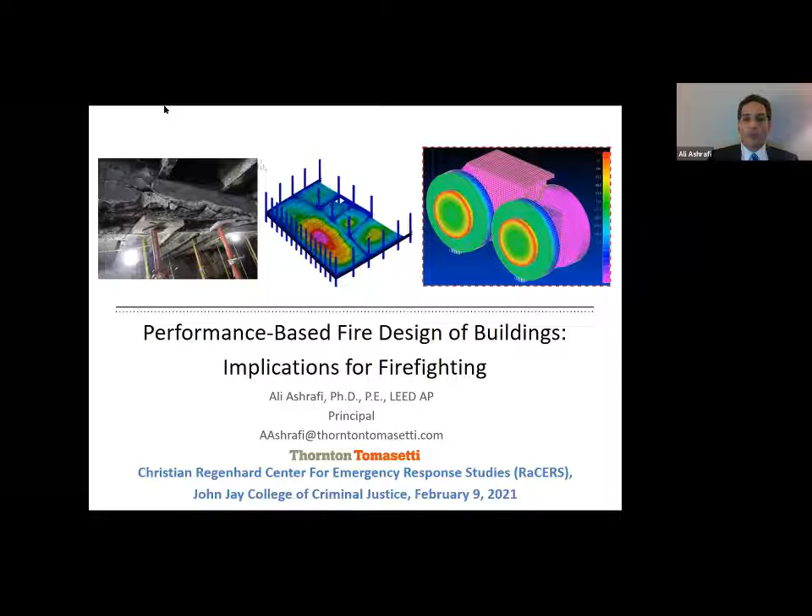So why are we having this conversation? The way we're designing buildings for fire safety determines what happens in the fire. They're not independent things. How we design determines what a firefighter will face in a fire. And the common practice in the design has substantial limitations when it comes to fire safety, and those have an impact on occupants and firefighters, especially when it comes to more high impact buildings.

And at the same time, we know that we can have designs that are safer, but those designs are not as common and they're not required by the code. They're permitted by the code, and even there, it's a long process. Now, I use the word design, but the discussion applies to both new design and existing buildings. And I will make separate points about what this means for new design and also what it means for firefighting in the context of existing buildings.

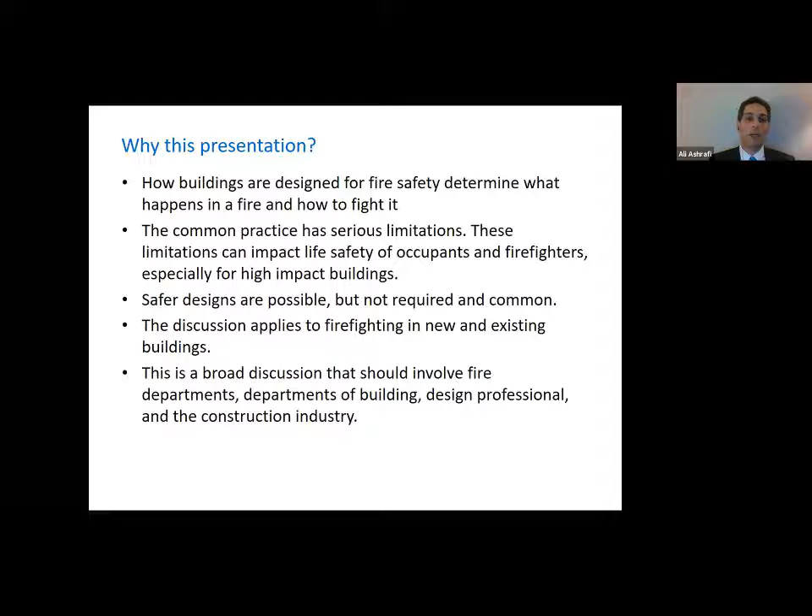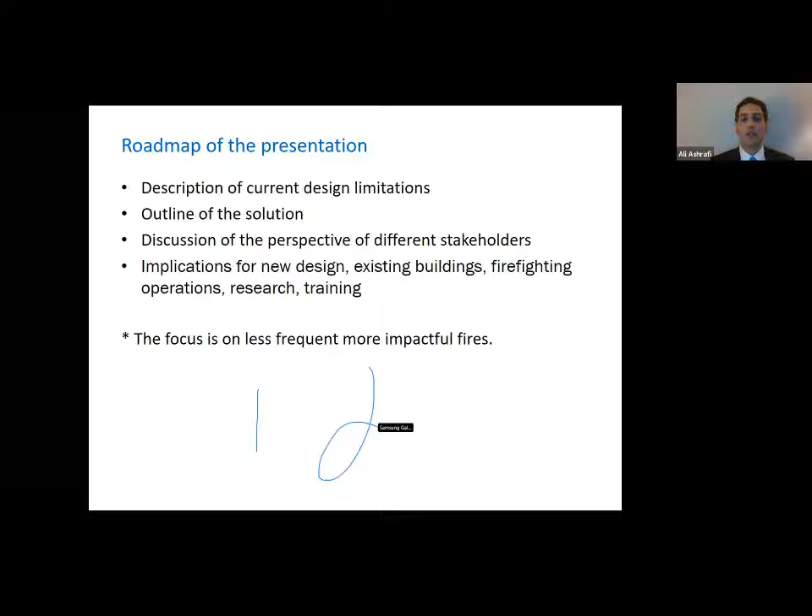And bottom line, to me this is a start of a conversation. We have a lot of people who are involved in fire safety. That includes fire departments, building departments, design professionals, the construction industry. So hopefully this is a conversation that leads to better and safer designs. For this presentation, I will provide a quick description of the current design limitations and then an outline of what the solution would look like.

And then we will have a discussion about the perspective of different stakeholders that are involved in this process, and also talk about the implications for new designs, for existing buildings, for firefighting in the sense of operations, research, or training. Although the discussion is broad, my focus will be on the less frequent but more impactful fires. On smaller, more frequent fires, I think we've learned a lot from experience, and we know a lot more about how to deal with them.

So what is the common practice? The common practice is prescriptive design. What that means is that the code tells you what materials to use and not to use, where to put it, and how to tie it together. So you are following the instructions of the code to result in a building. What it doesn't do is quantify what happens in a fire. You don't analyze what will happen, and you don't have any sense whether the consequences of a fire will be acceptable. It's presumed that once you follow those prescriptions, you'll get a safe building, but you don't actually design explicitly for that.

And when it comes to the question of stability of buildings in fire, that's a question that's not answered. That's a question that's not asked in the prescriptive design process. There's zero analysis involved in that.

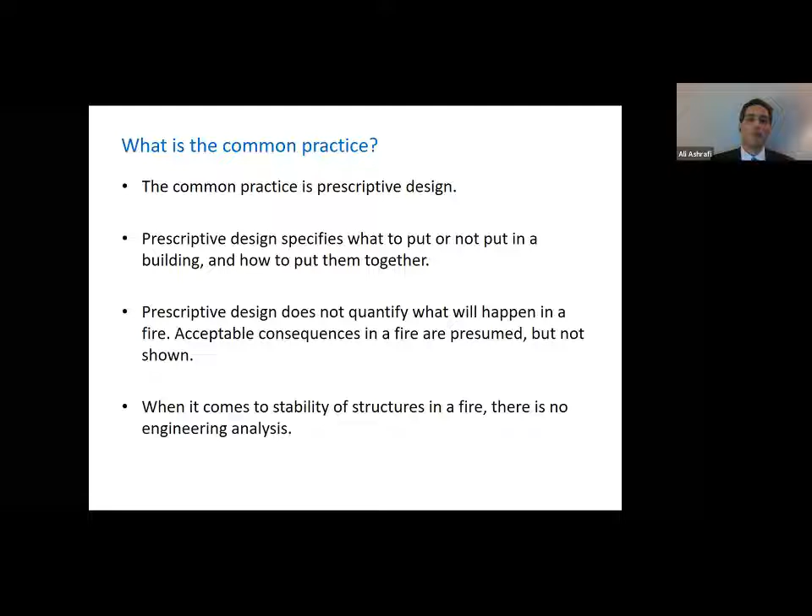Okay, so to put prescriptive design in context, this is what it would mean for us to design a shuttle using prescriptive design. It means that you would be using specifications and testing procedures from previous generations of shuttles, although now we're dealing with shuttles that have a different size, different materials, you're trying to get to a different location, you're using different fuels, but you're using that older set of instructions to come up with your design.

And we provide component specifications. For example, the specifications would tell you to have this tonnage of fuel within your shuttle, and the thickness of the exterior of the shuttle shall be this much. But you do not specify performance goals. You do not say, design such that the combustion gives you enough force so the shuttle can escape gravity. Design such that the heat of combustion and re-entry does not burn the shuttle. Those would be things that we actually care about.

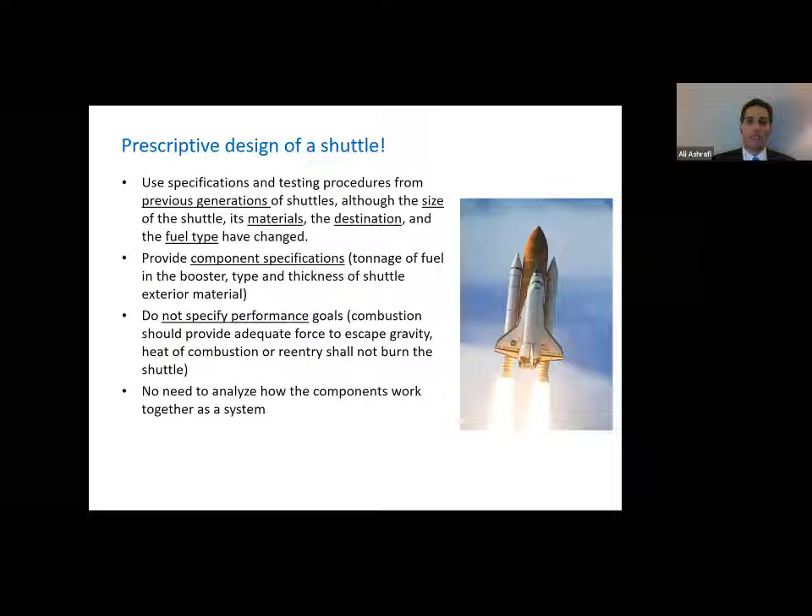They're performance goals. Those are not specified in a prescriptive design. And then once we've tested individual components, we don't do any analysis of how they work together as a system when you assemble them into a shuttle. That would be prescriptive design of a shuttle. I don't think that would be a good process. That's exactly how we're designing buildings for fire.

So we use testing and a design framework around the concept of fire resistance ratings, which was developed a little more than 100 years ago. And in that time frame, the size of the buildings has changed, the materials that we used, the construction techniques, how we design the buildings, what is the layout of your floors, what do you do inside the buildings, and what goes inside the building and forms the fuel. All of these things changed while our design process and the framework is basically the same.

And then within that process, we specify component specifications. For example, your individual elements, your beam or your column has to have this much fire resistance as defined in code. Your sprinkler has to have this much capacity. Your standpipe shall provide this much water access. Or your means of egress should be this wide. Those are all prescriptive. We tell how to build the building.

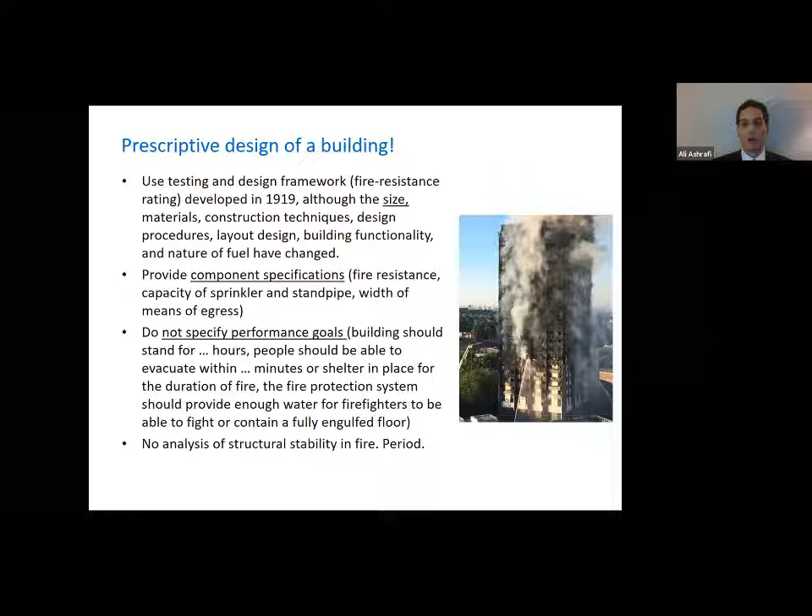But we do not specify performance goals, which would be telling, okay, your building should stand up for this duration, or people should be able to evacuate within these many minutes and either shelter in place or evacuate the building entirely. Or saying that the fire protection systems within the building should provide enough water so that you can fight a fire of such size. Those are performance goals that would be actually useful in terms of understanding what will happen. Those are not specified in the code. And when it comes to structural stability, there is zero requirement for analysis. That's the prescriptive design of buildings for fire.

And that's a process that I want to highlight, compared to not having that, has improved safety, right? Having fire resistance is good. Having standpipes that provide some water is good. Having some requirements on egress is good. And for buildings that are smaller and fires that are more frequent, we have enough experience to know where the gaps are. The question is when you are stepping beyond that range.

Now, when it comes to firefighting in buildings, it's really important to pay attention to the fact that the building is the battlefield. That's where you are doing your process. So whatever happens to the building has a real impact on firefighting, and that building has changed substantially over time. As a firefighter, the goal is foremost life safety, right? And that includes the occupants, it includes firefighters and the public. And then after that, you have the goal of minimizing damage to the building, to the contents, and to the community. And there is interaction between these. If there's damage to the building when people are inside of it, or that impacts the area, obviously that's also a life safety question.

Now, when there's a higher risk to the people inside the building, that means that the firefighters will also have to take higher personal risk to go and rescue people, right? So to the extent that the design increases the risk or reduces the risk to the life of people, that directly increases or reduces the risk to the life of firefighters who are trying to do that. So better design can simultaneously reduce the risk to life for firefighters and the people inside the building.

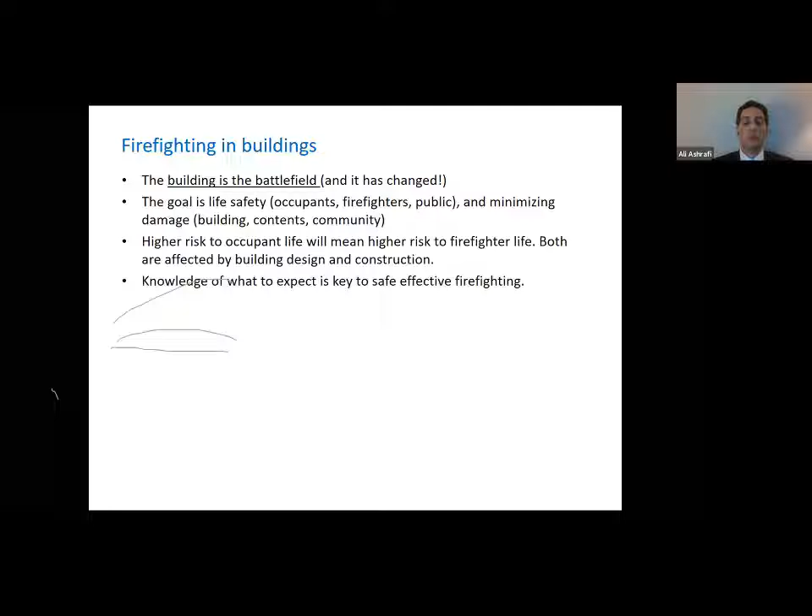That battlefield, the building, has changed substantially over time. We're building structures that are taller, larger, leaner. They have wider spans, and they have different construction techniques than we used decades ago. It's quite common to have open floor designs, which change the extent and spread of fire. The exterior walls of the building look very different from what we had a few decades ago. You have different air tightness.

Your windows typically have a lot more integrity. You might have some combustible materials within the construction of your exterior wall. And then the system is a lot more complex. That facade has to provide lighting, energy performance, fire safety, constructability, aesthetics, all of the above. And so there are competing demands on the exterior wall, which means we have much more complex systems to deal with compared to, again, 50 years ago.

We also have new building materials that are becoming more common, high performance concrete, heavy timber, etc., that are coming into the structures, but we don't really treat them separately to see what that means for the design. Looking at firefighting response, obviously, if you have a taller or larger structure, it takes longer and it's harder to have access for firefighting, right? That should have an impact on how we look at these designs.

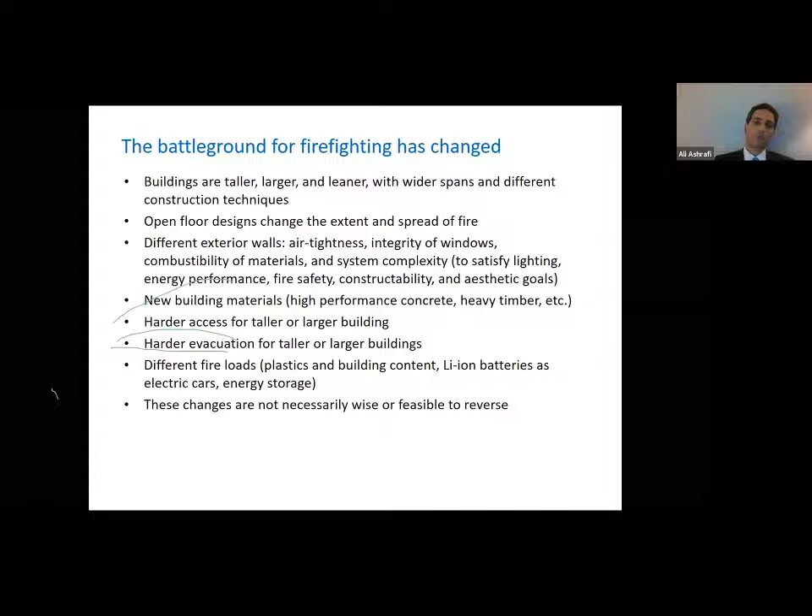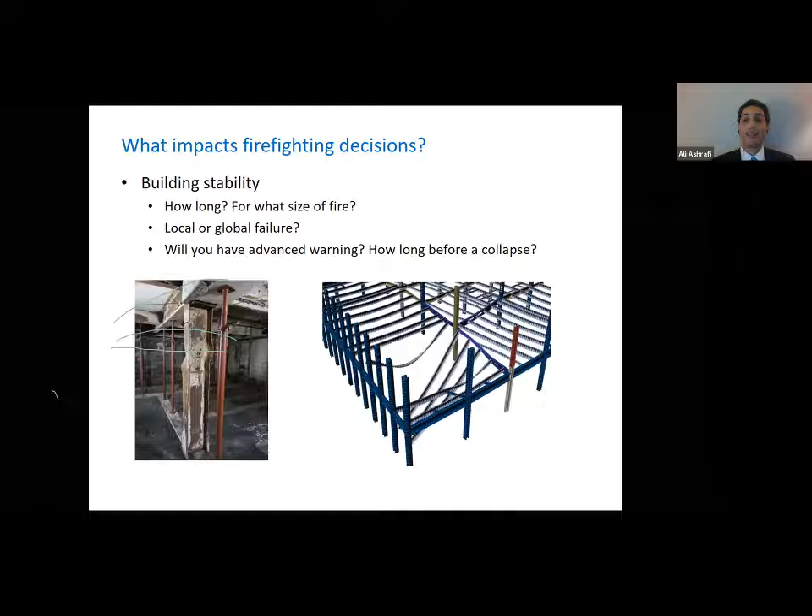So now, when you look at it from a firefighting perspective, there are a few things that will have an impact on your decisions. One of them is obviously building stability. So here the question is, how long will the building stand up, and for what size of a fire? If you have failures, will they be local and contained failures, or will they be global failures? Will you have advanced warning that something is going to give way? And how long will you have before that collapse? So these are questions that are very related to the design, right? But they really impact firefighting decisions.

And the nature of fire itself. Is the fire local, or does it involve the entire floor? What is the speed of that spread? Are there any additional specific hazards, such as hazardous materials or explosion risk associated with it? Has the fire spread to multiple floors? Is there fire on the exterior of the building? These are very impactful on how to fight the fire. They're all driven by design and construction of the building.

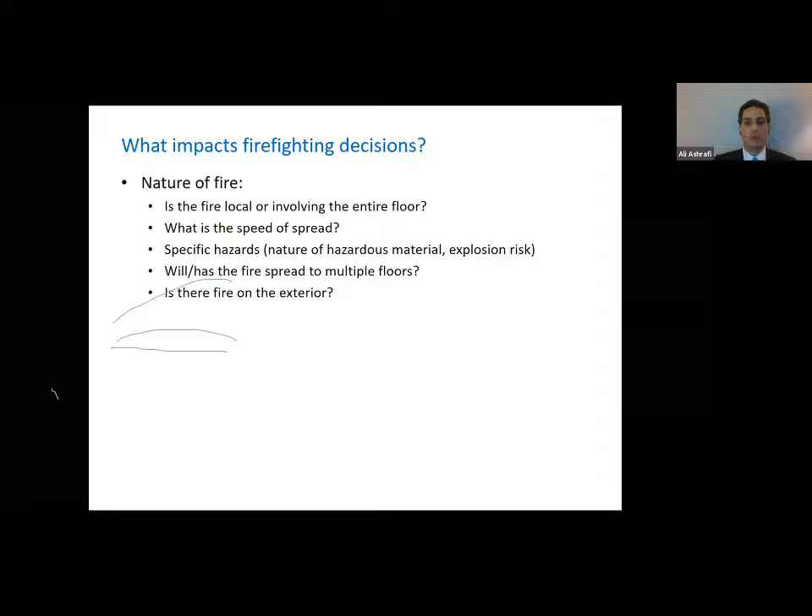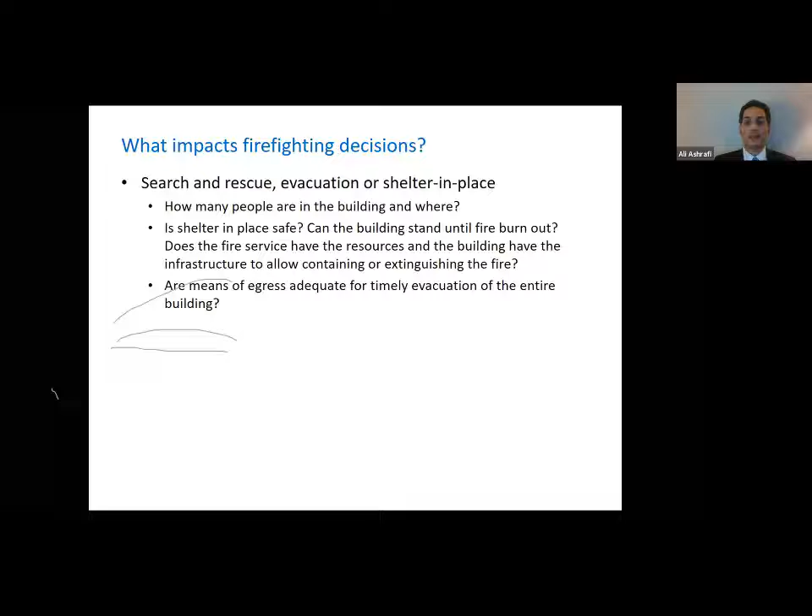There's also the question of search and rescue and whether you can evacuate or have to evacuate, or whether people can shelter in place safely. So obviously you need to know how many people are in the building and where, but then the question is, is sheltering in place safe? Can the building stand until the fire burns out? Does the fire service have the resources, and does the building provide the right infrastructure to allow for containing or extinguishing a large fire? And related to all that, are means of egress adequate for timely evacuation of the entire building? Or do you have to have shelter in place as part of the process? Again, these are questions that are impacted by design and construction of the building.

On the logistics of fighting a fire, how long does it take before you can start the effective firefighting? If you're fighting a fire on the 40th floor of a tall building, you can't just go in, right? And you don't have access from ground level to help you. How much does search and rescue interfere with the firefighting mission, right? Those are competing demands on the same people and on the same means of egress, for example. And are the building fire protection systems, such as the standpipes, the sprinklers, adequate for the type of fire that you will get in that building? Or are they helpful, but they're not enough?

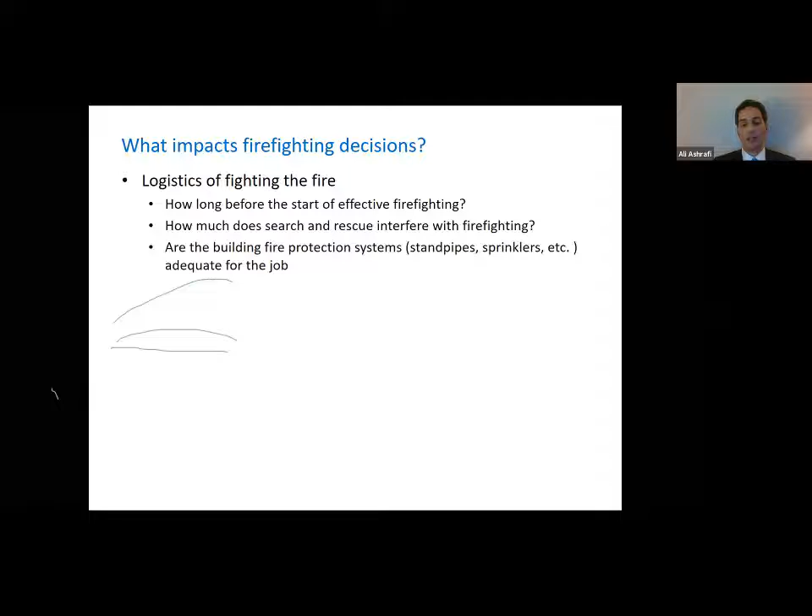And then how typical is the fire? So if you're dealing with a fire that happens frequently, you've had experience with this, your colleagues have had experience, that's useful, right? We know how to fight them, they're known. So that's good to know. But if you have a large fire in a complex and unique building, such as a high-rise or a complex space, we probably haven't experienced many such fires, right? And so each of those will be a unique experience, and so that bears on the decision-making by firefighters.

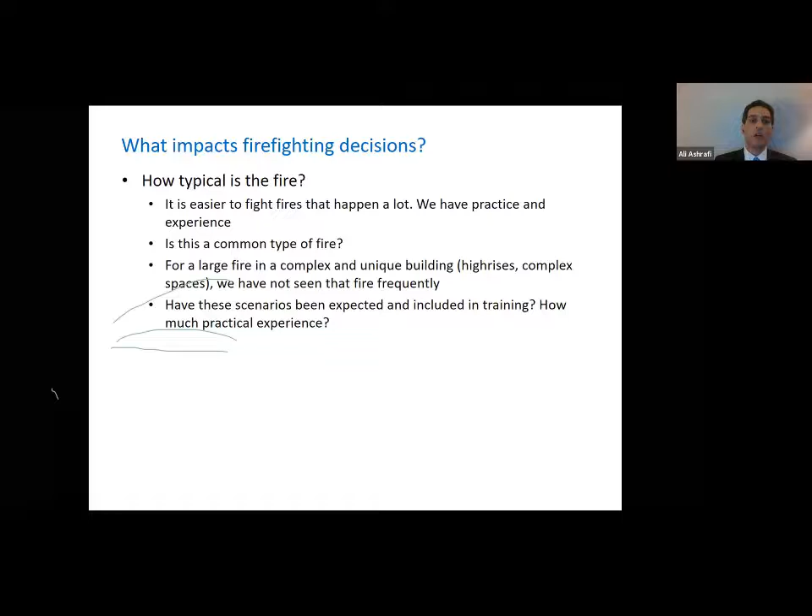And to the extent that we've thought about this or we haven't, are those things that have been or can be captured as part of the training, so that even though you don't face that fire every day, when you go there, you've gone through the exercises multiple times, understanding what will happen in the building. So these are all very relevant questions to firefighting: building stability, the nature of the fire, search and rescue, logistics, and the nature of the fire, how typical is that? Most of these are impacted by how we design the building. And so that relationship is very important.

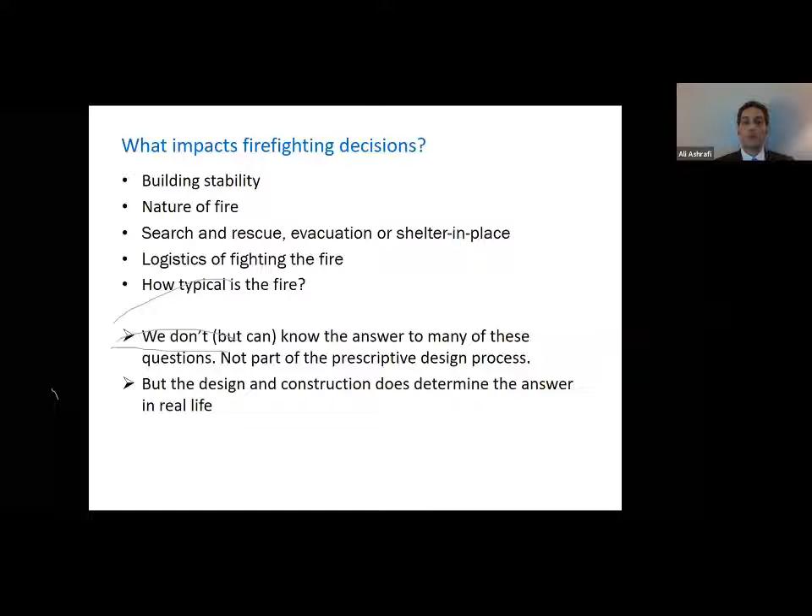For most of the buildings, if you ask these questions, we don't know the answer. Not that we can't know the answer, but we don't know the answer because we haven't analyzed the building; the design process does not require such analysis. And so that is a limitation, right? You don't have the answer to the relevant questions to make the right decisions for your safety and the safety of the people. So although the design doesn't answer these questions, the design and construction determine the answer to these questions. We just don't know them because we haven't asked the question. So to me, that is a real problem, right? That does pose real risk to firefighters and the public.

And the solution, the key to the solution is knowledge. We need to know what we have. For a specific building, what are the risks involved in the fire, the building stability, the egress and evacuation, and how do those things interact with each other? What are the consequences of your fire, right? And what are those interactions? We also have to realize that for these more complex buildings, each of them is a custom design. Each of them will have a somewhat different behavior. Going back to my previous analogy, each building would be a different shuttle. You can't just copy paste and assume that it's safe. You really have to look at the specifics of your building.

And so the solution to that is performance-based design. That's a term that you might or might not have heard, but what it really means is you're looking at individualized design for acceptable consequences. So you're looking at your building, the one building, as opposed to a typical building, whatever is specific to that building. And you're looking at the consequence of the hazard, right? In this case, for a fire, what will happen after the fire? And what you're trying to get through your design is to make sure that those consequences are acceptable. Those are consequences that in this context you can literally live with, right? That's performance-based design. And that is a rational design process. So you have very specific safety goals, and everything that you do is because it's providing some additional benefit in terms of getting to that goal.

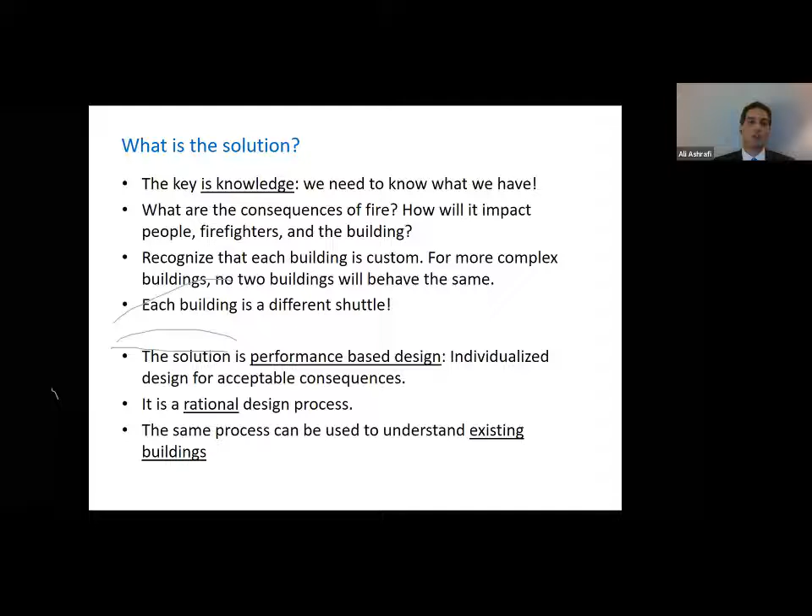Now, I mentioned this as a problem. I think I gave you why this is a problem, but this is also not just a theoretical, abstract problem. This is a recognized problem. I'll give you a couple of examples. Here are a few examples from full-scale tests that were done by NIST very recently. So they did a couple of tests on steel beams, long-span steel beams with concrete on metal deck. So very robust construction, fireproofed fully, and they subjected them to realistic compartment fires, which are typically less intense than the furnace test we use for fire resistance testing, right? So the fire was realistic and less demanding than the testing.

In their testing, they had several cases where the beam failed. So you would have a collapse of the beam that's fireproofed, and the failures happened in the range of an hour, plus or minus, in some cases. Some of the failures happened during the heating, some during the cooling phase. So they had cases where they turned off the furnace, they're going home, and the next morning when they come in, the beam has collapsed, right? And you can see the behavior of, again, these are code compliant, perfect construction.

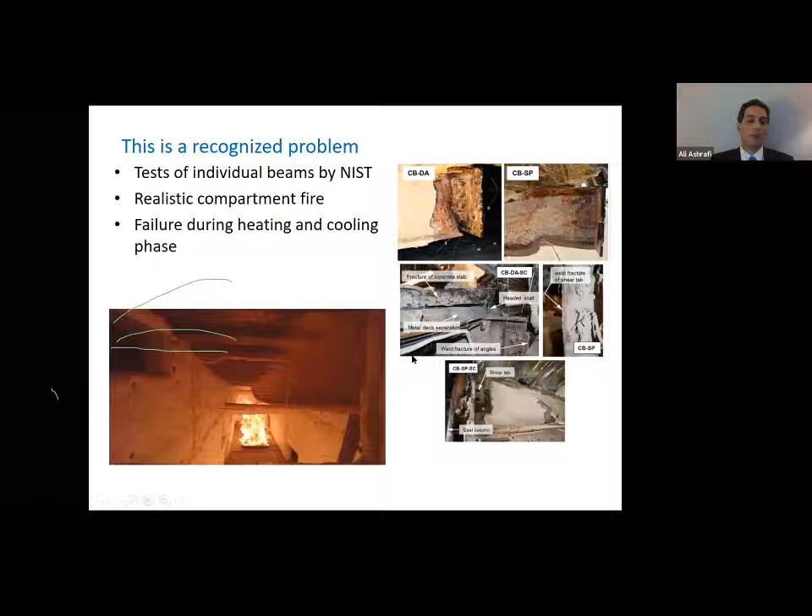This is how the beam looks like. Obviously, they've removed the fireproofing so you could see what it looks like. You have failure of the connections. You have separation of the concrete from the metal deck. The bolts have sheared off, major failures in designs that are realistic.

This is another test where they did a full bay, two-story full bay, actually 2 bays of a building, same type of construction, and the testing was finished a few months ago. So for this one now, they're using the standard fire curve. So this is what you would use for getting your fire resistance rating. And this is constructed according to a 2-hour rated construction.

And after 70 minutes, you have major breach into the slab. So you're having flames showing up at the next level, which means now you have a fire that has engulfed 2 floors. Entirely changes everything about assumptions of stability, evacuations, and how you fight the fire, right? And that happened in 70 minutes for a structure that is fireproofed for 2-hour fire rating.

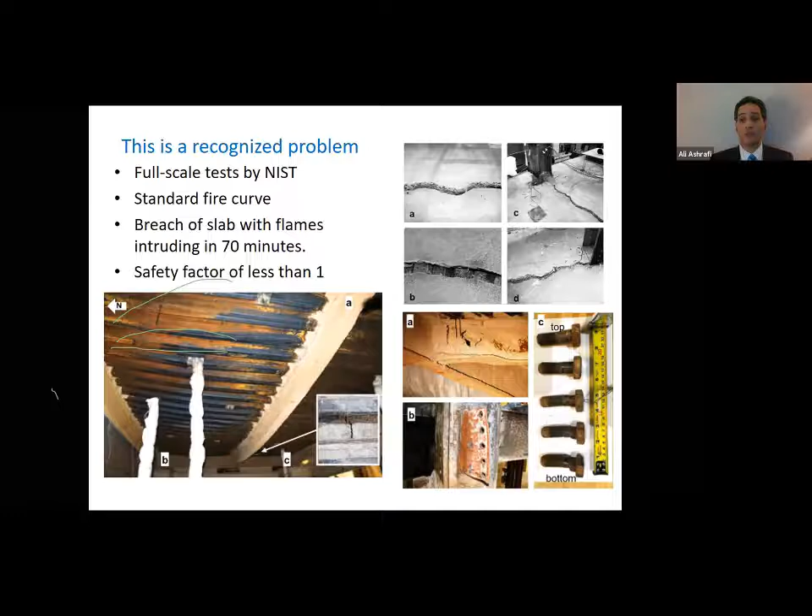At 70 minutes, they stopped the testing, so they did not continue, and there was no collapse because of that yet, but there was major damage, including rupture of some of the bolts at that point. So this is not a theoretical conversation. These vulnerabilities are real. And these are very substantial structures, right? These are robust buildings. A lot of the buildings are not as robust as that.

Similarly, there was a study that was sponsored by ASCE, which is the American Society of Civil Engineers. We were part of that discussion, and we looked at 4 different buildings and how a prescriptive design would behave in fire versus how a performance-based design would behave in fire. And for example, we looked at a typical high-rise and a comparison. And in the case that we studied, because you could not evacuate that building quickly, the goal was getting resistance for full burnout.

And there was no amount of fireproofing that we could put for that specific design that would get you to that performance. A safe design did require adjustments to the structure, most notably to the connections, and also some redistribution of the fireproofing. And actually, we put more fireproofing on the connections, we put less fireproofing on the beams. All in all, there was less fireproofing within the structure, but it was distributed such that it's where it's providing the most benefits, and the structural connections were also adjusted to provide that performance.

So we managed to show that the prescriptive design is limited, but B, you could actually provide a safe design, and that safe design is not necessarily more costly. It's just you've gone through the process.

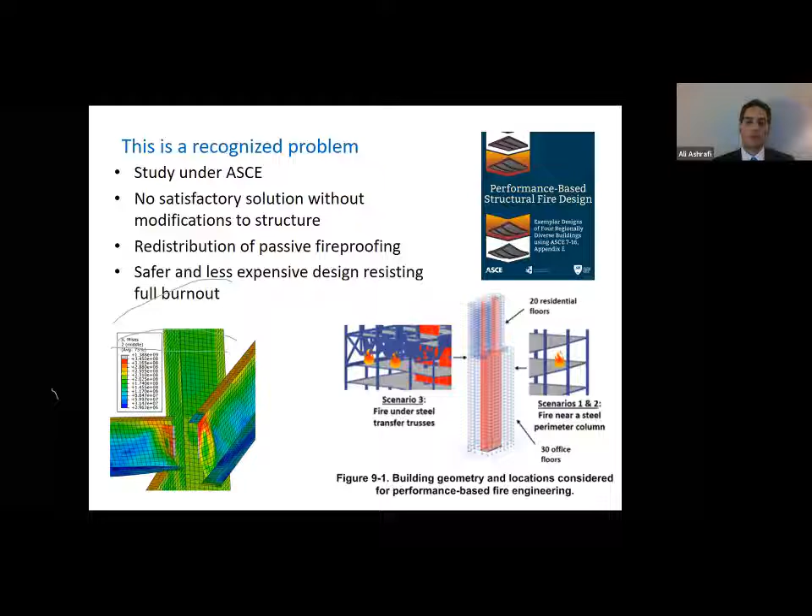I also want to bring a quote to say this is also not just structural engineers talking about this. So this is a quote from Bobby Halton, which I'm sure Glenn knows him very well. He's the editor-in-chief of Fire Engineering, and he's the education director of Fire Department Instructors Conference. And he was chief of training and operations at different times at Albuquerque. This is from a paper that was published probably less than a month ago. I'm just going to read the quote.

While the fire service is thoroughly engaged in evaluating our tactical and procedural approach to structural firefighting, the very battlefield where we conduct those firefights is not undergoing the same rigorous evaluation and study. American firefighters want buildings and their structural systems to be studied under modern fuel loads. We want these structural systems tested as a complete building, not individual pieces. We want that research communicated to us so that we can better evaluate areas of refuge and evacuation routes and have a greater sense of understanding regarding collapse and failure.

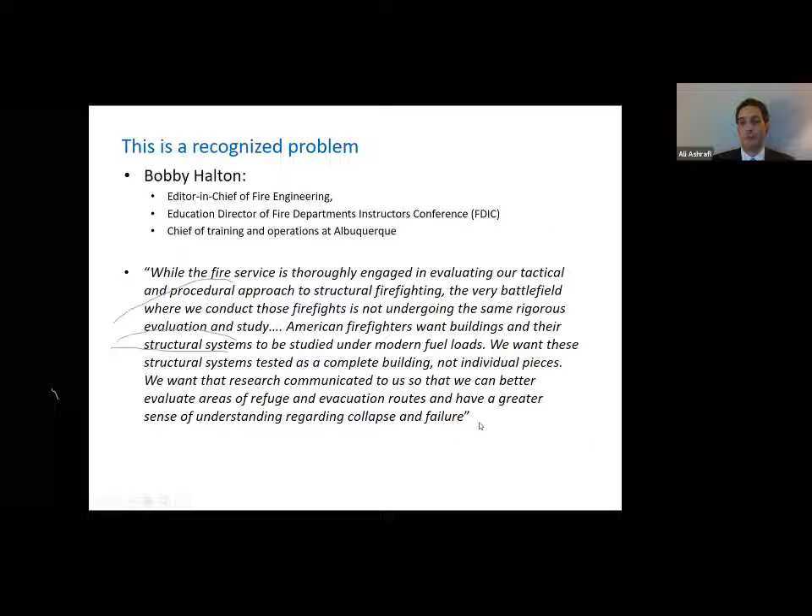So this is a real problem. We have real solutions to that. And so we want to see what the implications are. I'm bringing another quote also from Dr. James Quintiere. For anyone who might not know him, he was the chief of fire science and engineering at NIST, and then he went to University of Maryland and was a chaired professor at the Department of Fire Protection Engineering there. They asked him about one area where you would want to do really more studies.

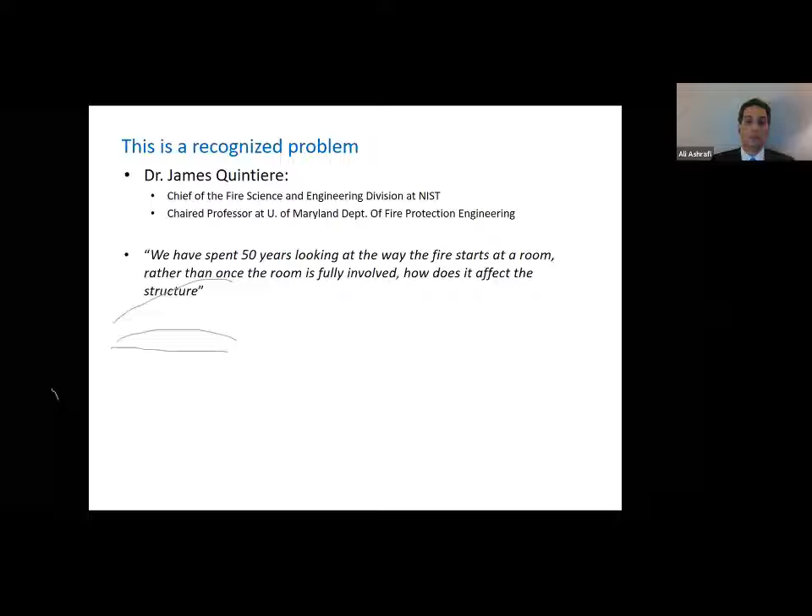And he said, we have spent 50 years looking at the way the fire starts in a room, rather than once the room is fully involved, how does it affect the structure? So this is a very relevant question for us. Now, my background is structural engineering. So my focus has been more on building stability as opposed to, for example, the standpipe capacity.

But I do want to mention that the other elements of fire safety, meaning means of egress, and also the design of sprinklers and standpipes and smoke control, those are also prescriptive, right? So the design doesn't say, okay, you have a large floor, it's an open floor, you're very likely to get a fire that involves the entire floor. What is the water that you need to fight that fire successfully? That would be a performance-based design, but the design doesn't do that, at least at this point.

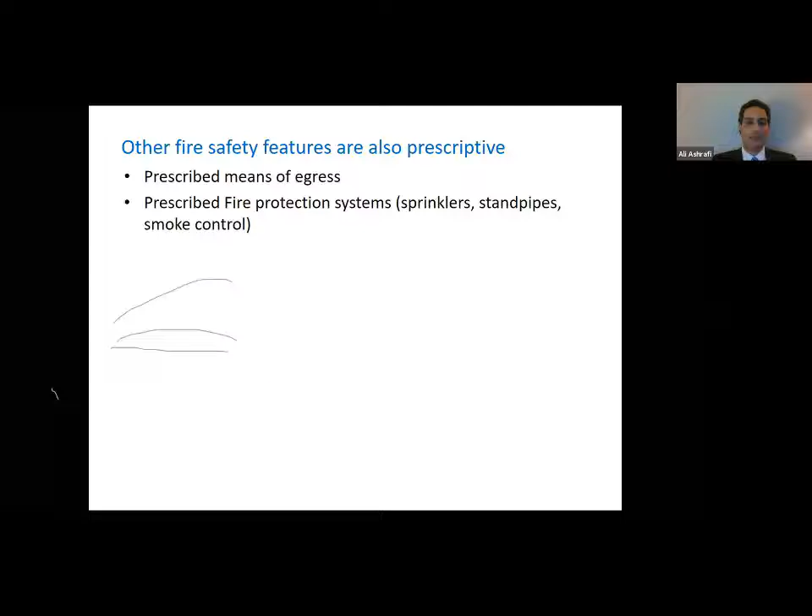And so I've talked about limitations of prescriptive design, but very broadly speaking, the main limitation is that you have unknown and in many cases unacceptable fire consequences. But the fact is it's unknown, so you can't plan accordingly to know how to provide safety. It's also not the most effective use of fire safety measures in a building. It's not a rational design. You're not doing things because they provide a benefit. You're doing things because you are checking the box in the code.

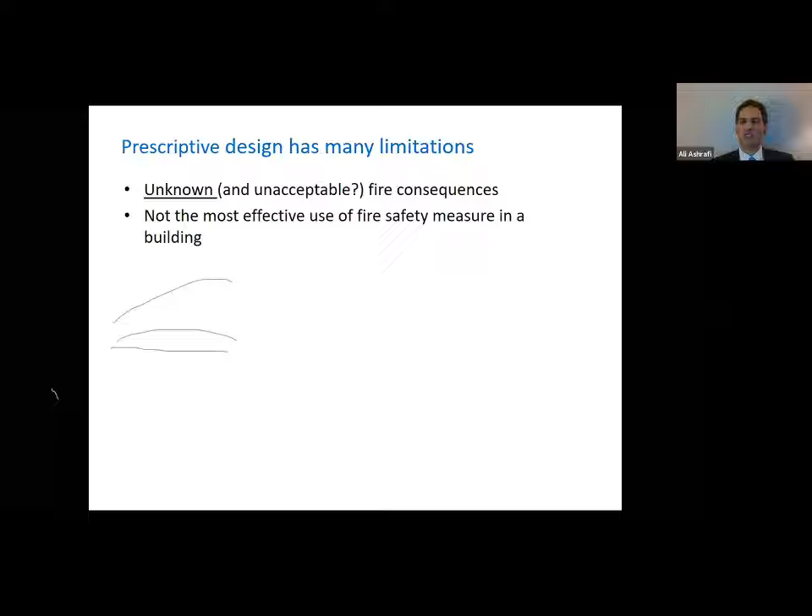All in all, the combination provides some benefits, but it's not the most optimal, the most rational design. And so that actually could mean that you have a more expensive design. It's not providing as much safety at the same time. Now, let me spend a few more minutes talking about why we get all these limitations from prescriptive design, and then I will jump into the discussion of implications.

Really, one of the main problems is that prescriptive design is based on component tests, not system tests. So we test an individual beam or an individual column. We don't test them together, and then we don't analyze them together. To bring the point home, we don't even test connections. The whole process does not have a protocol on how to test a connection. And I've mentioned connections are one of the most critical elements of building stability in a fire. So that's just not part of the process.

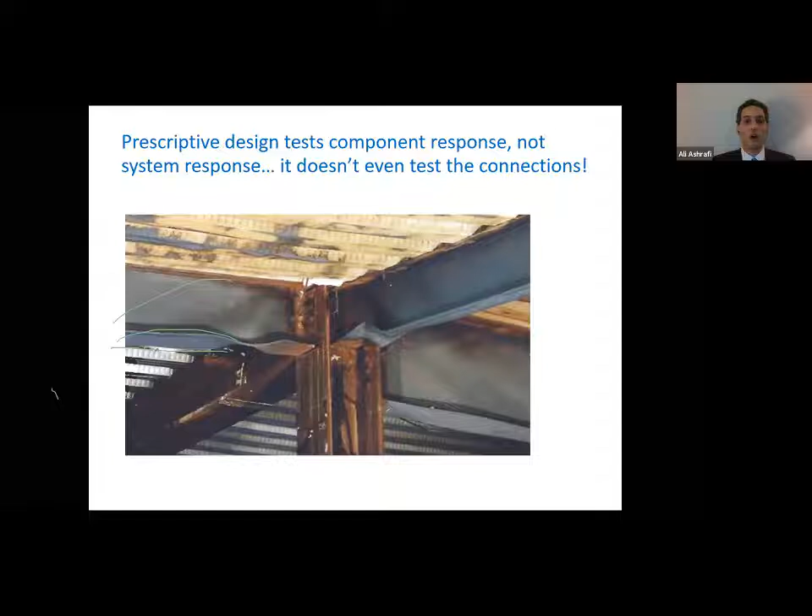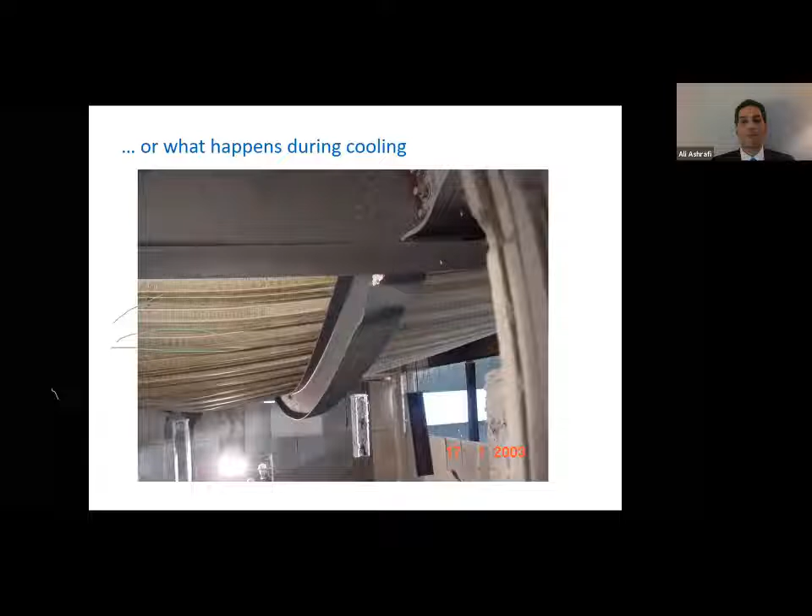The process does not look at the effect of thermal stresses properly. It doesn't look at what happens during cooling, which is where you might get failure. And again, cooling is relevant to firefighting. If you're fighting a long fire, you will be there for some duration after, or you might be in some part of the building, and in another part of the building, you are going into that cooling phase, right? This is a very relevant question to life safety.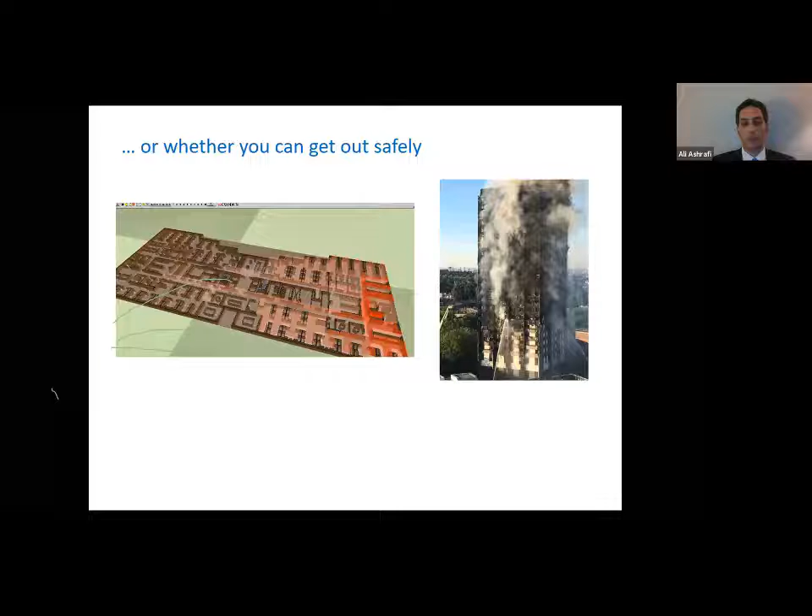Even going to the question of whether you can evacuate safely, that's a question that's not asked in the code. The code gives you prescribed means of egress, but very simple analysis can show that in many typical layouts, you could actually lose people, a significant number of people, in a building that is code compliant, because we don't ask the question. Once they check the boxes, the design is considered acceptable.

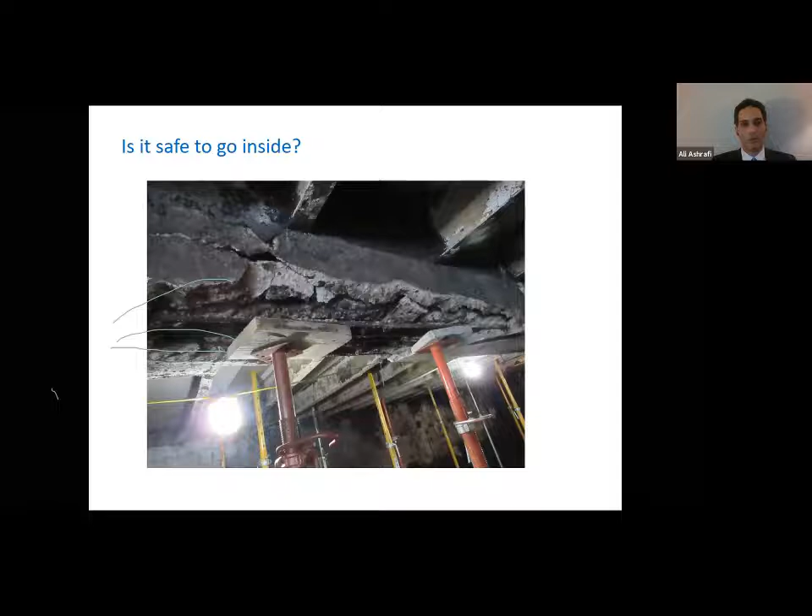The fire could be hotter or colder. It could be shorter or longer. The design process doesn't care. It's always that black line. In a lot of buildings, the actual fire demand on structures could be a lot less. We don't look at that. In some buildings, the demand might be more or different. Just to bring an example, I mentioned lithium-ion batteries.

If you have lithium-ion batteries having thermal runaway and starting to catch fire, what they produce is a much hotter fire. The temperature of the fire is more than the melting temperature of steel. So that's different from what we're testing for. It's also initially a much more intense fire, and it produces its own oxygen. It's much harder to fight. And the gases that it's producing are also potentially explosive.

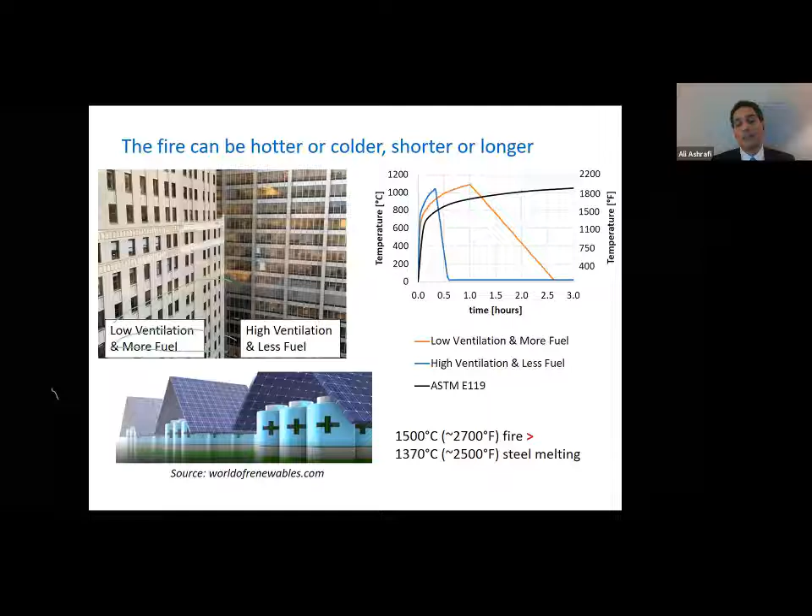So it's harder to get close and deal with that. All of this means that it's a different fire risk. It doesn't mean that you can't deal with this, but it means that you have to deal with it, right? If your process hasn't looked at that, then you have an unknown risk to everyone.

And an important question is, if something fails per design, because the design is not always trying to prevent failure, right? Even the code gives you specific durations of rating. The presumption is, if you have a 2-hour rating, I think everyone assumes that means you have 2 hours of stability. That doesn't really mean that, but it could be for a limited time.

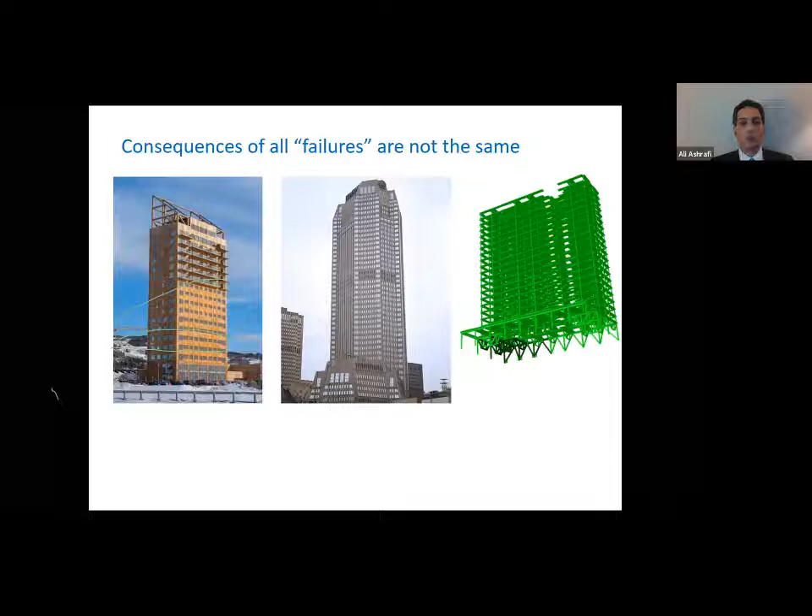But what is the consequence of a failure? A failure of a building that's smaller, where people have gotten out, where the failure is contained, is very different from a failure of a larger building where people will be inside and you could also have an impact on the entire neighborhood, right? We could presumably deal with those designs in a different manner. And the bottom line is, in the standard design process, we don't design explicitly for safety. We presume safety.

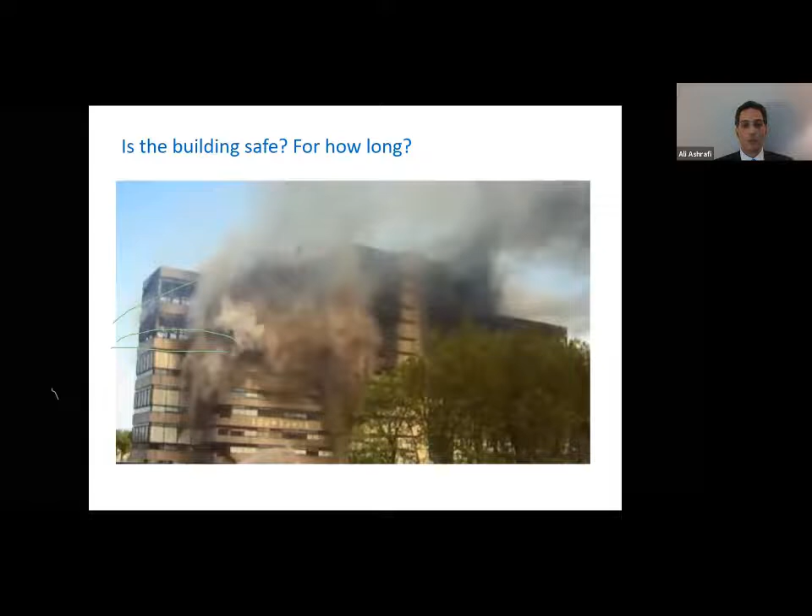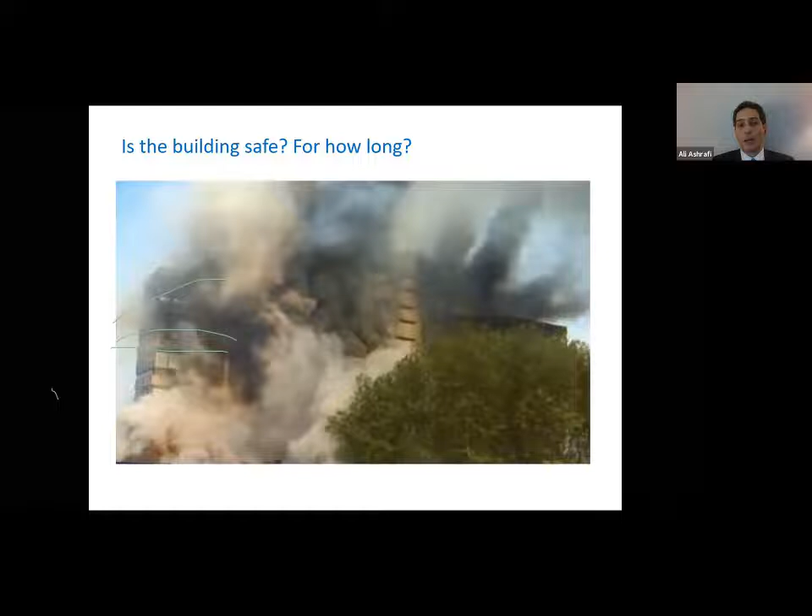This is an interesting video. This is a building in the Netherlands. It's a concrete building, which you would think of as somewhat more robust. And they had a small fire starting from a coffee vending machine. And you give it enough time, and it brought down a significant portion of this concrete building, right? That could happen because, again, we don't design for safety in fire in that sense. We don't explicitly design for building stability.

So I think we do need to move toward performance-based design to have a right solution for that kind of a building. And what that means is individualized design. You look at that specific building and you are explicitly designing for acceptable consequences. That's the only way to verify safety and plan accordingly. Otherwise, code does provide measures that mitigate risk. You know you have some risk mitigation because of all the things that go in, but you don't know how much mitigation and what is the risk that you are dealing with.

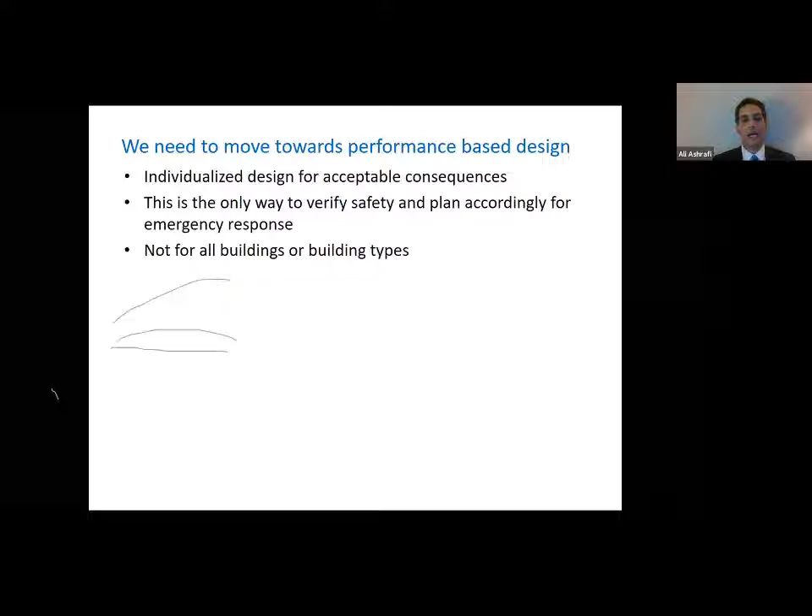I also want to highlight again, I'm not saying that this is the answer for all the buildings. A lot of the buildings are common enough within the range of where we've seen many, many fires and we know what to expect. This is really for designs that are outside that range and have high consequences. So we want to define performance goals and have them drive the design.

So some of the relevant questions here are, what are the access, protection, and time requirements to evacuate or shelter in place safely? This is for the people inside. And to fight the fire safely and effectively, right? Those are relevant questions. Those things should drive the design on access, protection, and the time that the structure gives you to do those things. Fire protection measures and systems, means of egress, all of them should reflect that. The structural design should also reflect that and provide adequate stability for that duration.

Or in principle, you could design high impact buildings for full burnout, where within each area, the fire has burned out and the structure can stand up. If you have a bad case and the fire is traveling, you might have a fire that extends for a long duration, but within each limited area, the fire burns for a limited duration before it dies out, and you can design the structure to be stable for that duration. The bottom line is firefighting strategy and design should be consistent. They do relate to each other. They have to also talk to each other.

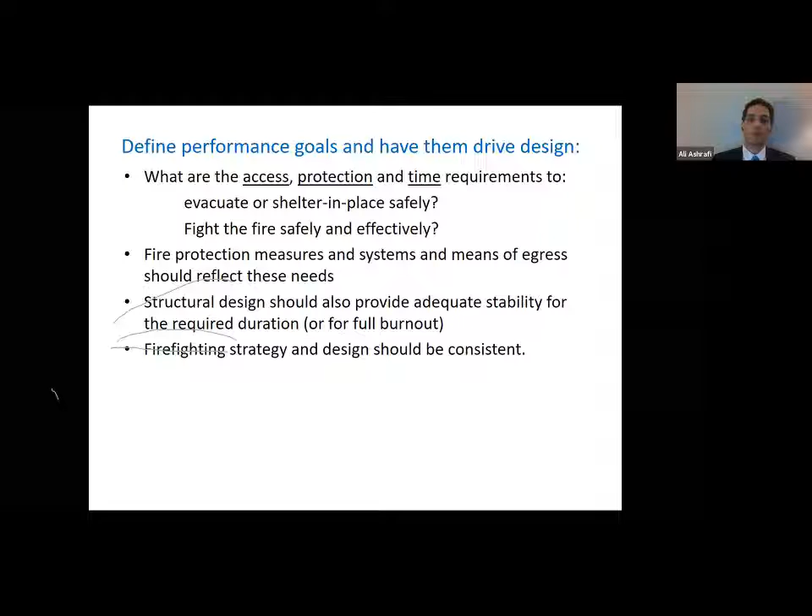Now, I've talked about performance-based design. It's important to note that codes do permit performance-based design. This sentence is the first sentence in the introduction to IBC. It establishes minimum requirements for buildings using prescriptive and performance-related provisions. So the process is permitted. Providing life safety for firefighters is also an explicit intent of IBC. And I mentioned IBC here as the mother code, where almost all the other codes are directly or indirectly taking provisions from IBC. So just for the sake of discussion, most codes would have the same types of provisions.

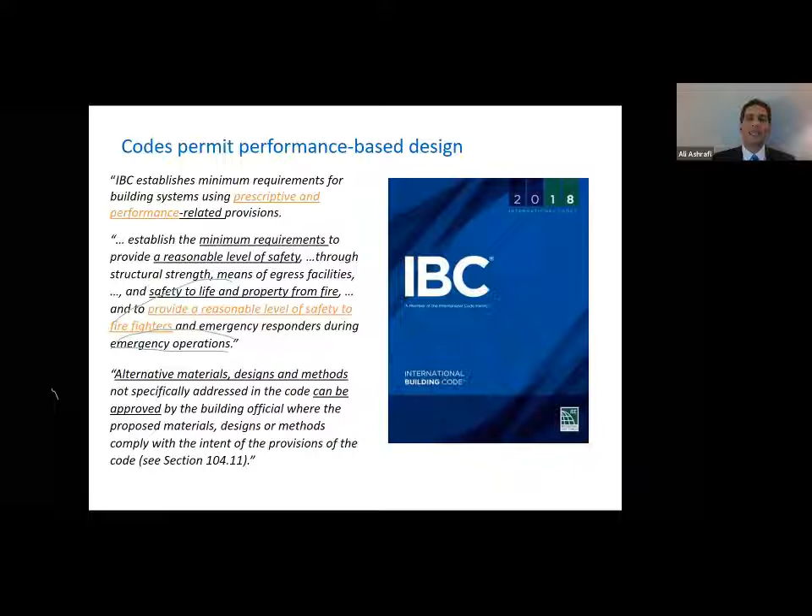And the code also allows for alternative materials, designs, and methods, but they just have to be approved by the building official or the authority having jurisdiction. So this is a process that's in principle permitted, but it does need specific approval from the authority having jurisdiction, or the AHJ. We also have standards for performance-based design.

We have standards within the steel manual, within concrete documents, within heavy timber documents, and there are codes on how to do that. So ASCE 7, which is the document that tells us how to design buildings, in ASCE 7-16, Appendix E explicitly discusses structural fire engineering. ASCE followed that with a manual of practice and then a practical guide for engineers on how to do that. And we helped author this last document. So it's there, it's permitted by the code. It's also safe and has precedent.

And it's good to look at it more broadly. We're talking about fire here, but obviously we design buildings for other hazards that could also be significant. For example, earthquake risk is a major driver in a lot of areas. We've been using seismic performance-based design for at least 40 years now. We're doing it widespread. If a building is important right now, most of those buildings do go through a performance-based design process as opposed to a prescriptive process.

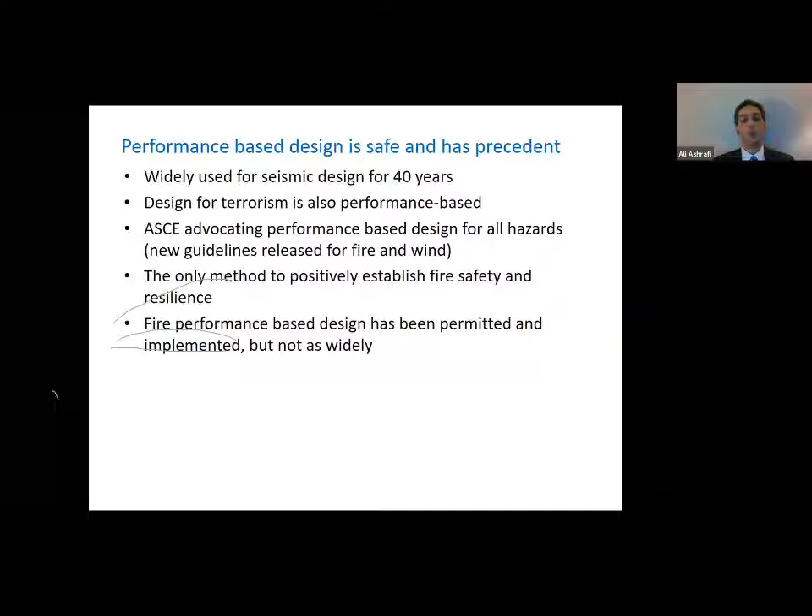And I also just want to mention, we don't have time to go through a lot of examples, but fire performance-based design has also been implemented within the US and globally. So it's something that we know how to do. It's just a harder process to get through, and not everyone has been doing that.

Now let's look at some of the implications. So one of the questions is, why would a public or private owner want to do fire performance-based design on their project, or decide not to do that? So let's look at it from that perspective, because we need to understand the construction industry as a whole if we want to have more performance-based design.

So the important points here are, one is performance-based design is optional. It's not mandated by the code. And also not all projects need it. A lot of projects don't need to go there, right? Performance-based design is also an intelligent design. It's a rational design. So typically what that means is that for the same level of performance, for the same safety, you actually get a more optimal design.

And so in a lot of cases, you can manage to improve safety, reliability of the building, and at the same time improve your design flexibility and economy. So in that sense, it would be an attractive option for an owner. Some owners might care about all of the above. Some owners might care more about the design flexibility and economy aspect of it, right? But that package does have the improved safety and reliability. You can't get the financial benefits, if there are some, without getting the safety benefits. And so that's important to note here.

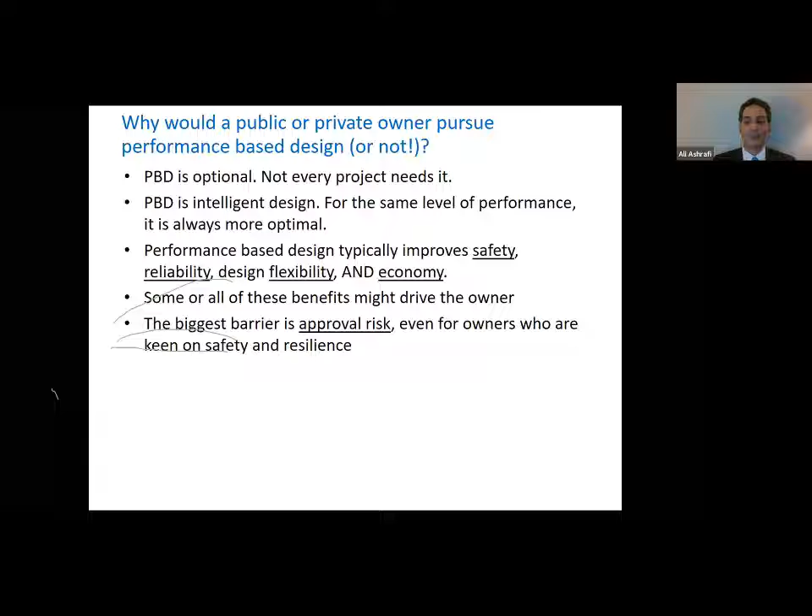But even for clients that care, I think the biggest question mark for owners when they want to decide whether to pursue performance-based design or not is the approval risk. If they think that that process is going to just sidetrack the entire design, they might decide not to pursue that, even if it has the safety, financial, design flexibility and reliability benefits. So that's really the biggest deterrent on the developer and owner side.

I think it's also really important to look at this question from an AHJ perspective. I'm not an AHJ, but I can say this. If I were, these are the questions that I would be looking at. It's really important to emphasize that the burden of proof should be on the design team, and it is on the design team. So the design team is coming and asking to do something different. The AHJ has to be very probing and make sure to put them to the fire and make sure that they actually provide a design that does provide all of that.

When it comes to the context of fire, it's important to note here that structural analysis should be part of that process. If there's a performance-based design and it doesn't look at how the building behaves in a fire through an actual structural analysis, that performance-based design is incomplete.

I think third-party peer reviews are also an important part of this process. They're important because they allow you to ensure the quality of the process, to make sure that when there's a design that's more complex, more advanced, you have a second person, a third person that has no incentive in the project, has the right qualifications, and have them vet the process too, so that there's more confidence and assurance to the AHJ. So I think those 3 steps are really important to ensure that performance-based design is done in a manner that provides the promise, provides safety for the building.

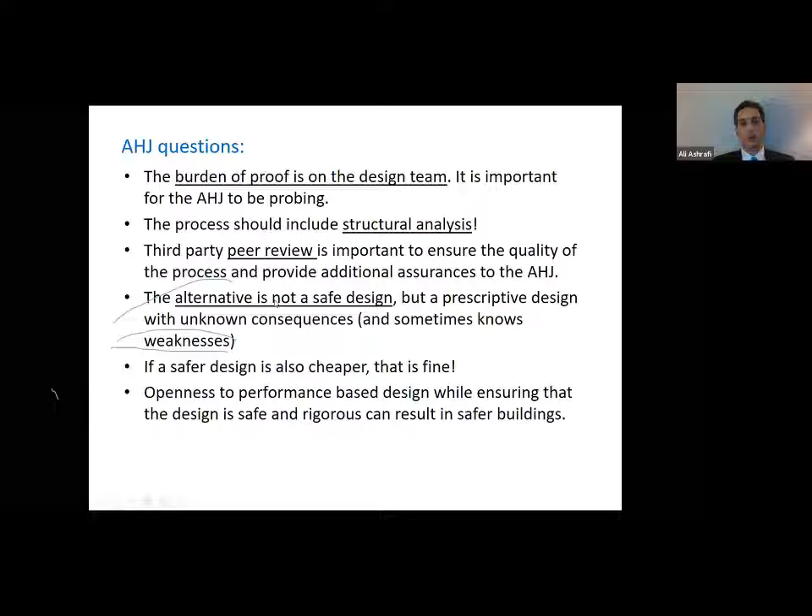And if a design really does produce a safer design, but it ends up being less costly, that is fine. That's a good thing, right? That actually makes sure that the incentives are there. The final result is we will have more buildings that are designed using this process. So we will have more buildings that are safe for the people inside of them and for the firefighters. So I think both sides of that are important to have in mind. It's really important to do the first 3 things to make sure that the quality is there. It's also good to remember that the alternative is not necessarily safer.

I think a question that is relevant, I'm not sure if anyone is asking the question, but should performance-based design be mandated for any structure? To me, the answer is maybe. It does involve more things. It does really depend on the context. So the real question is, what are the consequences of a failure? If you have high impact buildings, especially in dense urban areas where a failure could have very catastrophic and large scale unpredictable consequences, looking at resilient designs as a whole is a good idea.

This would be a change, right? And I'm not just talking about fire in this context. If you're putting a very substantial building in the middle of a very dense urban area, you want to make sure that that design is resilient for seismic forces, for fire forces, if it's relevant for terrorism, if it's relevant for flood, right? Having a process to look at resiliency more explicitly and then decide whether there is something more that has to be done for a specific building is, I think, a good idea that each local jurisdiction should look at and decide whether that's relevant to them.

I do want to mention one point here, though. Obviously, any time that you do something that increases the cost, there will be pushback to see if it's justified. I want to highlight the point that performance-based design is a rational design. For the same level of safety, you get lower costs. So putting it in a different way, if you're spending the same amount of money, you can always improve safety, right? So if done right, in most contexts, performance-based design is not a more expensive design. It's just a more rigorous design. And that's something good to have in mind. Resilience doesn't mean more expensive. It just means better.

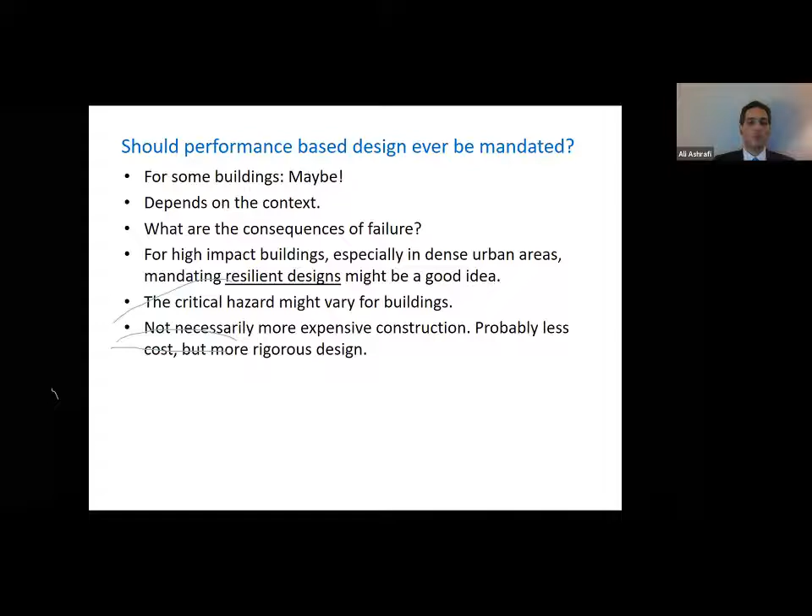Now, design can definitely make firefighting safer and more effective. I want to go through just an example, very high level. Let's say you're looking at a high-rise. Depending on what you have, timely evacuation of all the occupants might not be viable. And it's a high-rise, so it takes more time to start your effective firefighting. And just for clarifying here, for high-rise, I don't mean more than 75 feet. I mean tens of stories in this context.

In these buildings, it's also very common to have open floor designs, and that allows for faster spread of the fire to the entire floor, right? So it might be very possible, if you're responding to a fire in a building like that which was not initially contained by the sprinklers, that you will have a fire that's engulfing an entire floor. And so the design of sprinklers or the design of standpipes does not necessarily incorporate that.

They're not necessarily designed to fight a fire that's involving the entire floor roughly at the same time. That's something that in the context of fire protection engineering can be looked at, right? That's an element of design.

On the structural side, design for fire burnouts would certainly be more resilient in this context because it does allow firefighters to safely address the fire without having to choose between their own lives and the lives of the people on the inside. It's that time pressure that is really key to increasing the danger to everyone.

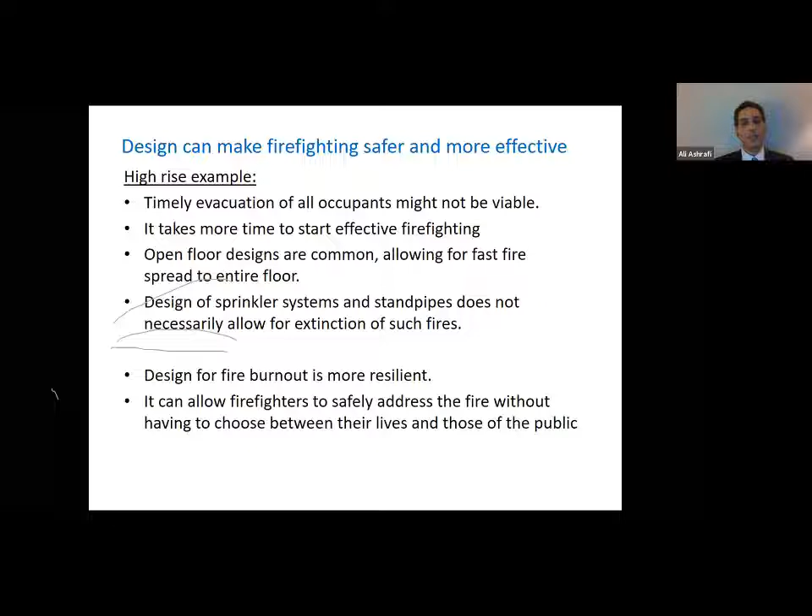If you know that your building is safe for the fire that you have, that as long as you've evacuated people from the immediate vicinity of the fire, the building will stand up, people can stay within the building safely, that's a much easier firefighting job. And it doesn't require you to put your lives or the lives of people in that balance and trying to make a decision, right? So certainly design can provide for a better, safer environment for people and firefighters.

Let's talk about existing buildings a little bit. My discussion talks about design, and again, sometimes you would think of that as new design, but the same discussion really does apply to existing buildings. And going back to my main point, the key is knowledge. If you have knowledge of what to expect, that allows you to have safe operations.

If you have prior knowledge of what to expect, that also allows you to actually plan for it and train for it and have your operations really reflect that, so you don't have to make decisions in the field where you have all the different types of pressures.

And so we can certainly study specific high impact buildings and see what to expect from them. Or we could study a group of high impact buildings and see what are the common features of them and use that to provide guidelines regarding what is the safe way of dealing with fires in such buildings so that the people and the firefighters are safe.

And so for that, we need to quantify the answer to these questions. What are the reasonable and realistic fire scenarios that could happen in those buildings? What is the structural response to the fire in that scenario? And how long is the structure safe in that fire? What are the realistic evacuation times and limitations?

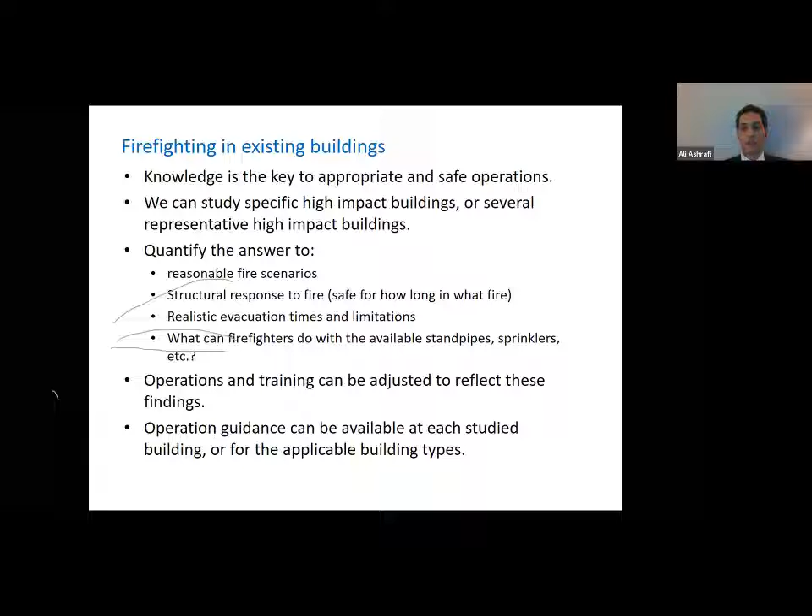In this building, we think if all the stairs are available, you can evacuate people in 45 minutes, or it's going to take 3 hours to evacuate people. Those lead to different decisions as a firefighter. And those are the type of things that, in principle, we can do for existing buildings.

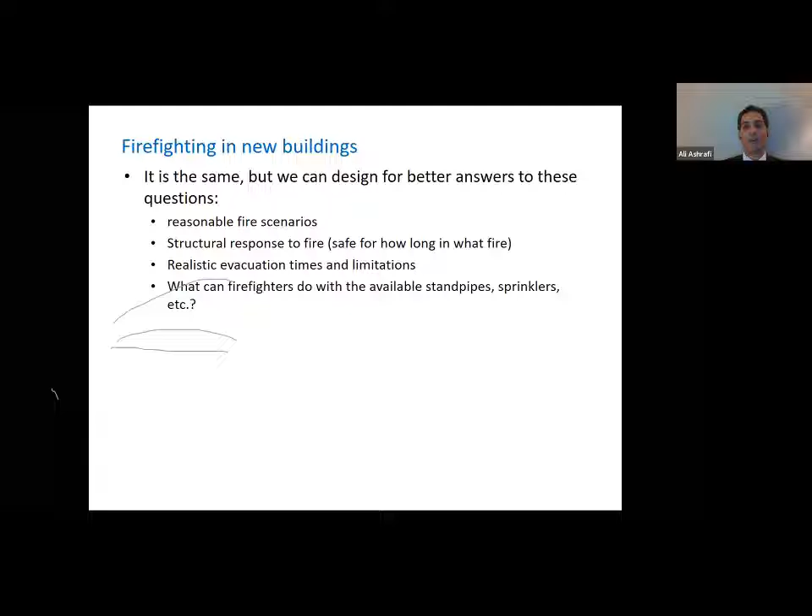For new buildings, it's all the same thing. The only thing is we could actually do something about it at the design stage too, so that that battlefield is a more favorable battlefield. You have more options, you have better tools and better decisions to make.

So I think I've talked quite a lot about things that have relevance to firefighting, but let's talk, as a wrap up, about what fire departments can do in this regard. And some of these could be short term, some of these are long term, and I'm really looking forward to feedback and thoughts from the audience. What do you think about these topics?

There's certainly some advocacy for things that are going to lead to better safety for firefighters. I think explicit consideration of structural stability during fire is really important, especially for high impact buildings.

I think that's in the interest of everyone, most of all firefighters. I think analyzing specific or typical existing high impact buildings could lead to information that leads to better operation manuals and better training for firefighters. It makes their lives better and safer. That's good.

I think bringing the building response to the discussion of fire safety anytime that that's involved, but an explicit discussion of the building response, not just a prescriptive discussion, I think that would be really good. And the fire departments are in a good position to have these conversations. Building response to a fire really impacts firefighters. You're putting your lives at risk. You want to make sure that you have what allows for the best, safest environment.

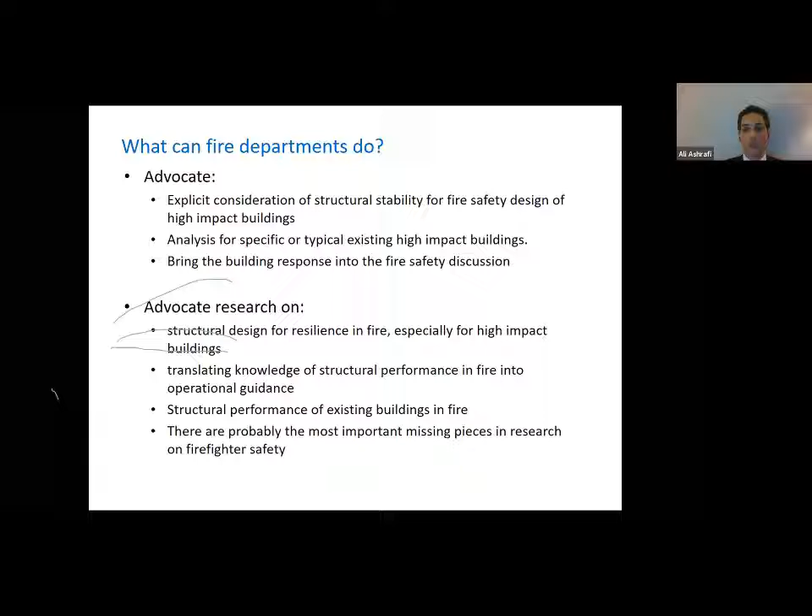Once we understand those things, and to the extent that we do, how do we translate that into operation guidance for the fire departments? Some money and time should be spent on researching that topic and connecting these two things, translating one into the other one. Structural performance of existing buildings is a subset of that research. I think that's a really important topic to focus on. And I'm sure there are a lot more that you have on your mind in this context that I look forward to hearing about. What else could be relevant in this context where research could advocate safety of firefighters.

There's also things that could be done on training. Certainly operations for high impact buildings can be updated based on knowledge that's specific and quantified based on building response in the fire and evacuation. Those two things will drive these decisions by the firefighters. And if we look at the answers there, we could update operations for these buildings. Certainly that could allow for customized trainings for specific high impact buildings.

I'm not saying that this has to be done for every building, that we necessarily have the resources to do that. But it could be types of buildings. We have a lot of, again, high rises throughout the country, right? Any lessons learned can be studied and even exercised on some of these buildings just to see how that works out. There's room for desktop training.

I envision flight simulators where you're a pilot, you go and you fly a lot of times, not in a real airplane, but in different scenarios, and you test out what to do and what the impact is. Something along that line could be helpful if it's tied to engineering and science, right? So if you have different building types and you model different realistic fires and you model the response of the building and you model the behavior of people, and then you make different decisions as a firefighter and see what happens, what are the consequences. Something like that could be very valuable. It could be visual, it could be not visual, right?

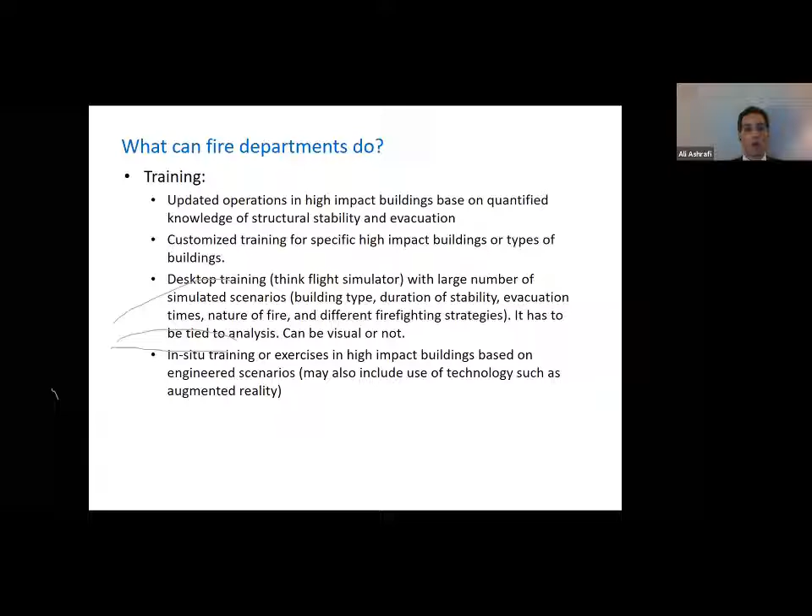And another concept could be, you could even do in situ training and exercises for high impact buildings. We've actually had some discussions on this with FDNY. You could use technology such as augmented reality or other things tied into the science that we have and go to a specific building and have an exercise and deal with a hazard without interrupting the operations of the building, without having any other cost, without having an actual safety risk, right? So there's a lot that can be done in training. These are my initial thoughts. Again, I'm sure there's a lot more thoughts within the audience.